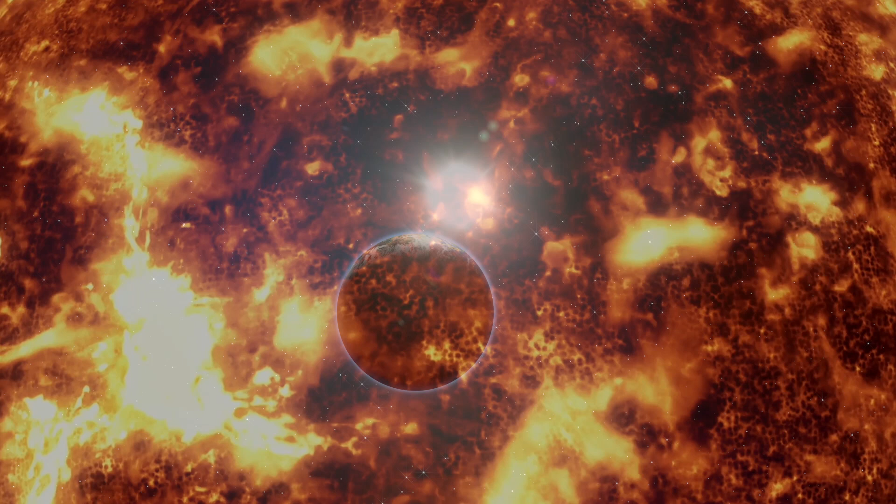More than 150 million kilometers away, this hot ball of glowing gases is the main source of energy in the form of heat and light necessary for all the Earth's processes. Arguably, the most important process is photosynthesis, where light energy from the Sun is converted into the chemical energy required to sustain life.

Without the heat of the Sun, the Earth's surface would be about 32 degrees Celsius cooler, and experts estimate it will begin to cool within 5,000 million years. Until then, it will remain the largest source of electromagnetic radiation in the planetary system, transforming 700 million tons of hydrogen into helium every second, or 5 million tons of matter into energy.

As our nearest star, the Sun marks the beginning and end of each day and shapes our seasons and climates. Therefore, it is of little wonder that the Sun has been the object of man's curiosity since time immemorial.

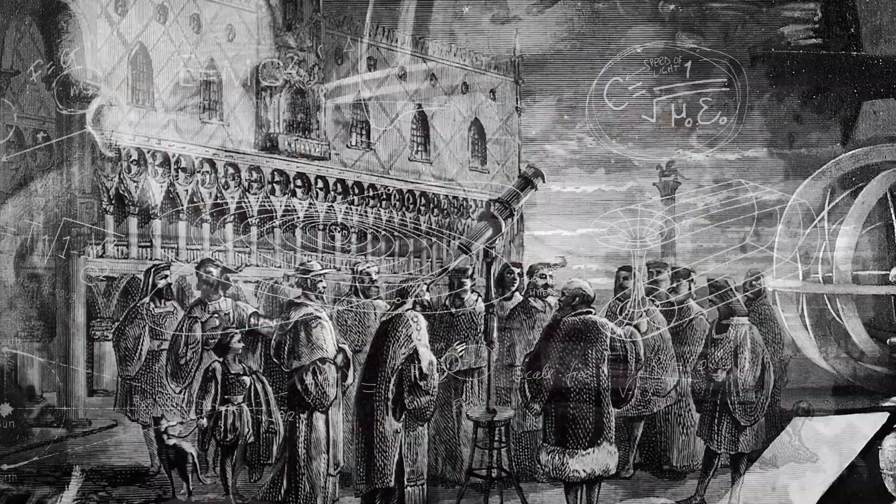In the 17th century, in his quest to unravel the secrets of the universe, Galileo designed and built the first known astronomical telescope. His telescope allowed him to make discoveries such as sunspots, confirm that the Sun rotates, and that planets orbit around the Sun, not the Earth.

400 years later, man is still observing the Sun with the same fascination as Galileo. Recent technological advances have been an important step forward for the astronomical engineering sector, offering the astronomical community the opportunity to study the Sun with more precision and rigor than ever before.

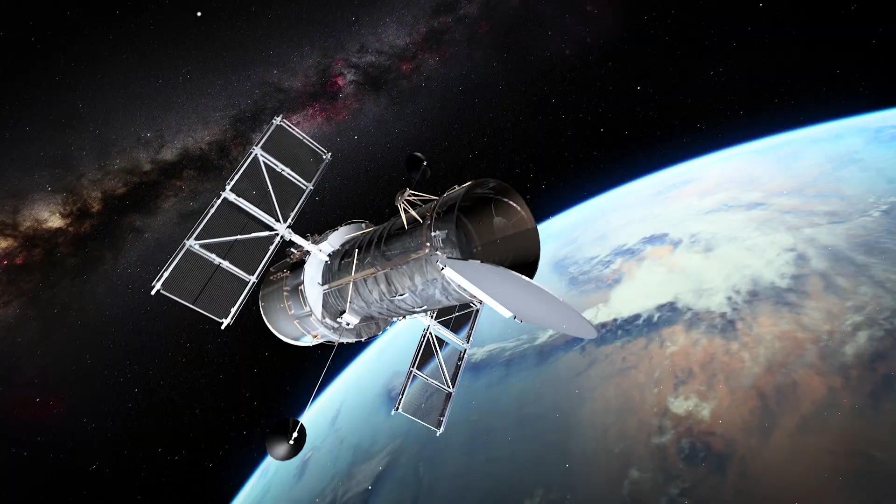Successive achievements in the field have led AURA, the Association of Universities for Research in Astronomy, NSF, the National Science Foundation, and the NSO, the National Solar Observatory, to launch the DKIST project, the world's largest solar telescope. These are the same organizations that in 2010 put their faith in IDOM to design, manufacture and assemble the dome of the telescope.

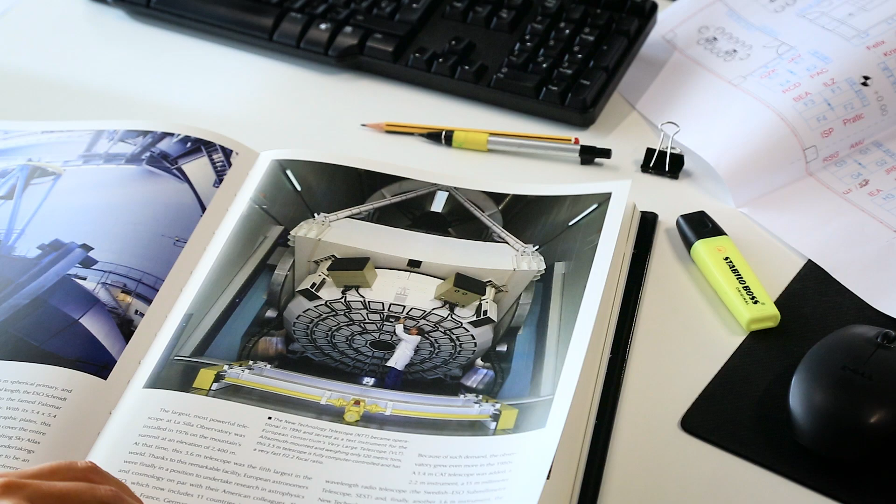This project has been implemented by IDOM ADA, the Advanced Design and Analysis Department of IDOM. IDOM ADA is responsible for leading some of the most challenging and innovative projects of the firm, using cutting-edge technological innovation in the development of structures, mechanisms, and control systems.

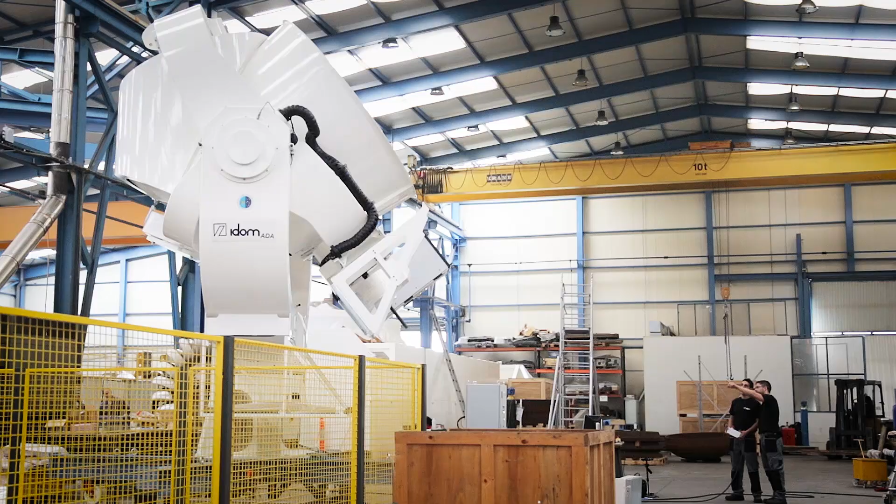IDOM is developing a significant activity in the astronomy field. It has designed and been engaged in the fabrication of some of the largest, most complex enclosures in the world, the QUIJOTE CMB project telescope, and telescope systems for large telescopes such as the folded Cassegrain instrument rotator for the Gran Telescopio Canarias on La Palma.

We have a large experience in manufacturing and fabricating capabilities all around the world, everything from industrial projects through scientific and testing projects, everything from football stadiums to oil refineries. Telescope projects and astronomy projects are similar in complexity and have a lot of challenges for on-site work.

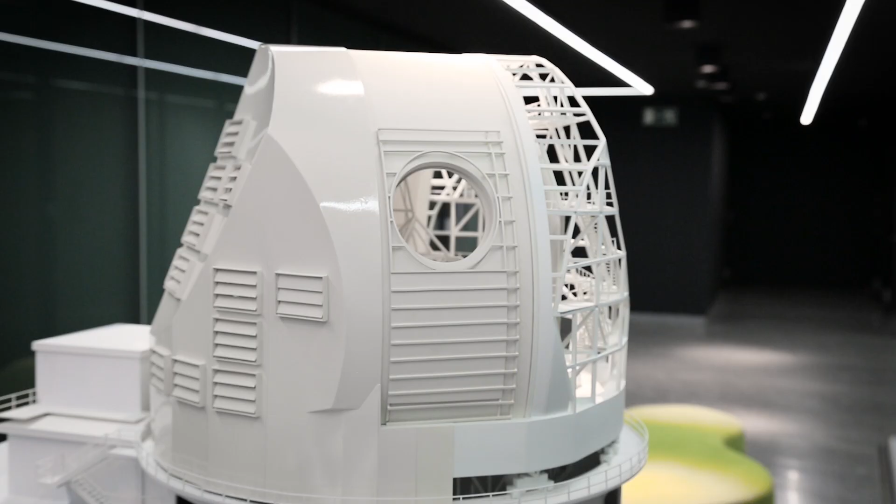The DKIST enclosure was a very attractive opportunity for us, a real challenge that we wanted to take. IDOM supplies the DKIST dome as a fully manufactured and commissioned turnkey part. We do not just supply engineering, we supply the whole manufactured part, in close collaboration with our office in the US. It has been a very effective collaboration.

This structural masterpiece, with which the Sun can be observed as never before imagined, will be installed in the archipelago of Hawaii in 2016, specifically at the Haleakala volcano on the island of Maui, at over 3,000 meters above sea level.

From there, highly qualified astronomers can study and anticipate the behavior and variations of our nearest star, which directly affects our climate. The same star we are analyzing to understand the processes of fusion that we are now trying to replicate as a source of alternative energy on our planet, and whose solar storms interfere in our electrical and electronic systems.

However, although it is being installed in the middle of the Pacific Ocean, the design, manufacture and pre-assembly of the dome has been carried out on the other side of the world, on the outskirts of Bilbao, in the Basque Country, near the headquarters of IDOM.

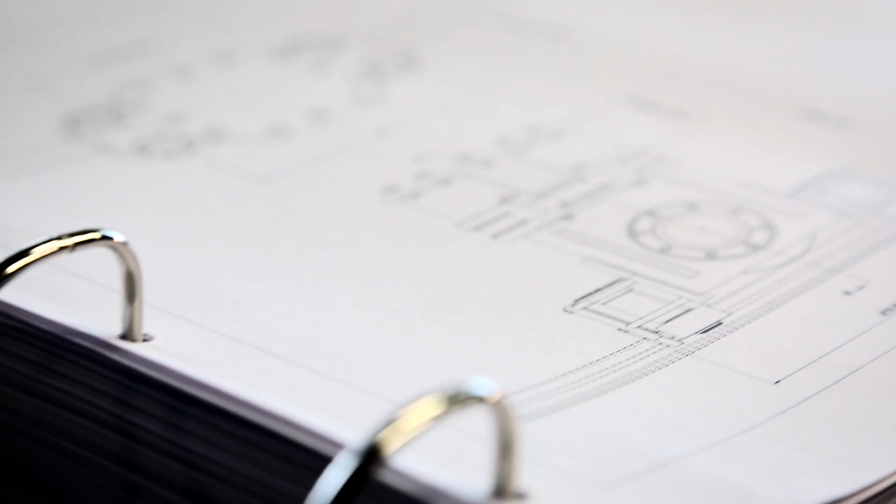We explored the options of fabricating this all over the world. We initially thought of fabricating this in the US directly. Finally, we also analyzed the possibility of manufacturing this in Bilbao, close to our headquarters, and we found it was the most cost-competitive solution. So that's the reason why we opted for this solution.

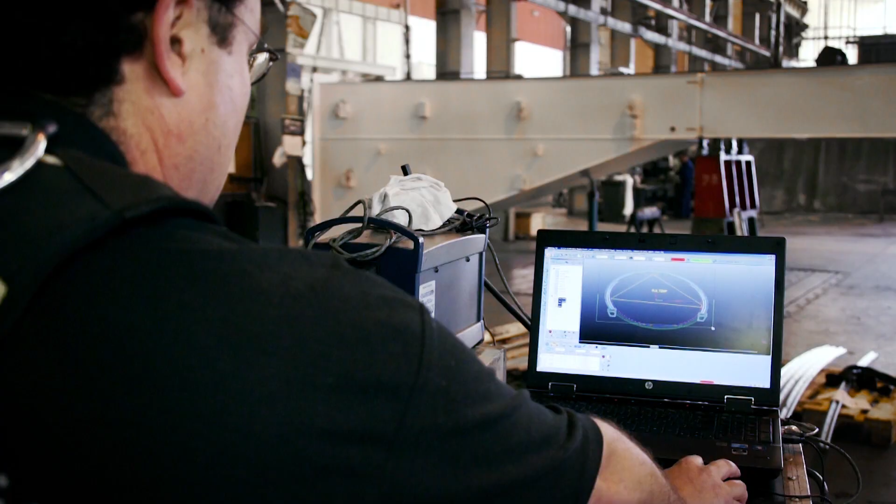We have here a large number of industries that provide high technology solutions at a very competitive price. Truly, the fabrication quality and capacity of the Basque region was outstanding, and it was a lucky coincidence that that kind of fabrication resource was also within easy driving distance to our headquarters in Bilbao.

With that, what we try to achieve is to perform the assembly in an area where we have really close access to equipment, to a crew for adjusting parts, machining, in order to be able to solve any problem that we could find out during the assembly.

In 2010, a team of highly qualified IDOM professionals began planning what was to be our most innovative engineering project. A complex task that involved close collaboration with our client. An extremely high level of coordination between the teams involved in different parts of the world, such as Germany and the United States, was also essential.

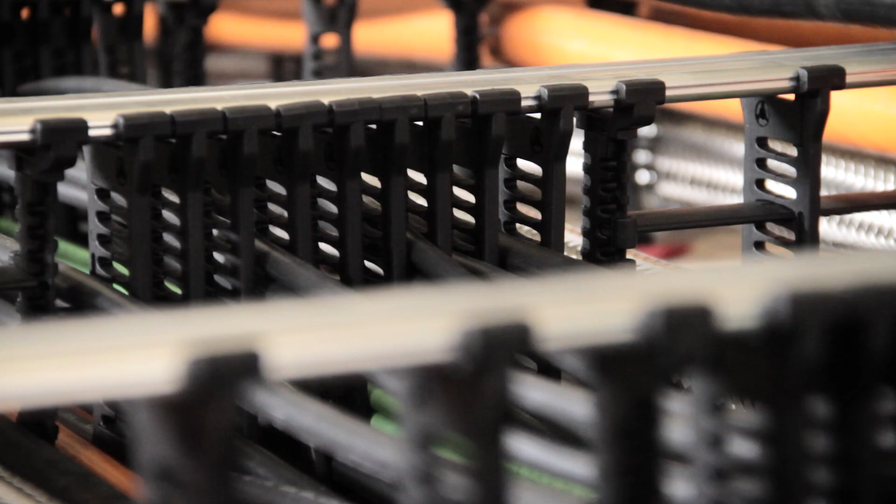AEC and IDOM have great experience in providing feasibility studies in all types of projects. One of our values that we provide clients in the astronomy sector is our ability to work on all phases of the project. Everything from preliminary feasibility type studies all the way through detailed design, fabrication, and then construction phase services.

One of the primary challenges on this type of project is to convince the customer of our ability to work in a multi-office environment. Those challenges can be overcome with great communication, where we've got a customer located in one section of the world, the project's going to be delivered in another section, and we've got design offices in the United States and Spain, all collaborating on the same project.

This means that we try to build a very close working team together with our client. It's part of our philosophy.

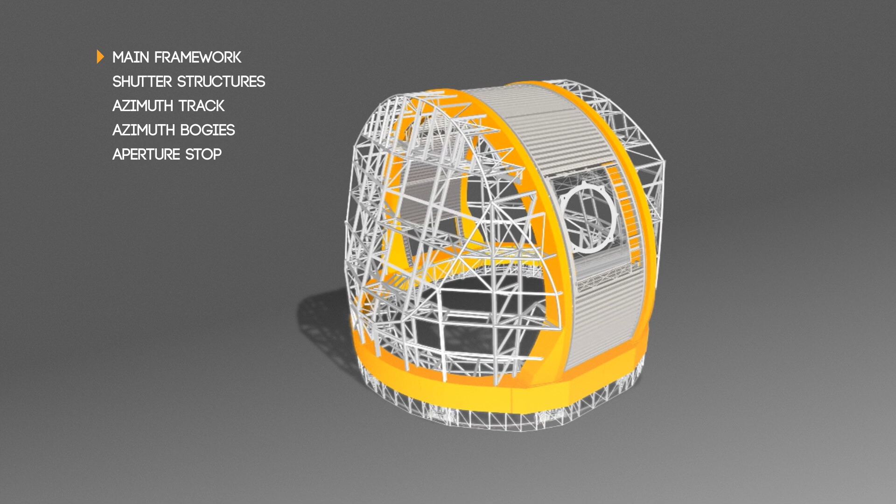Hundreds of specialists have worked hard for 4 years to bring the dome to life. 27 meters in diameter and 22 meters high, covering the heart of DKIST. Equivalent to a 7-story building and weighing 500 tons, the enclosure will move with millimetrical precision, allowing the 4-meter primary mirror to observe the path of the Sun throughout the day.

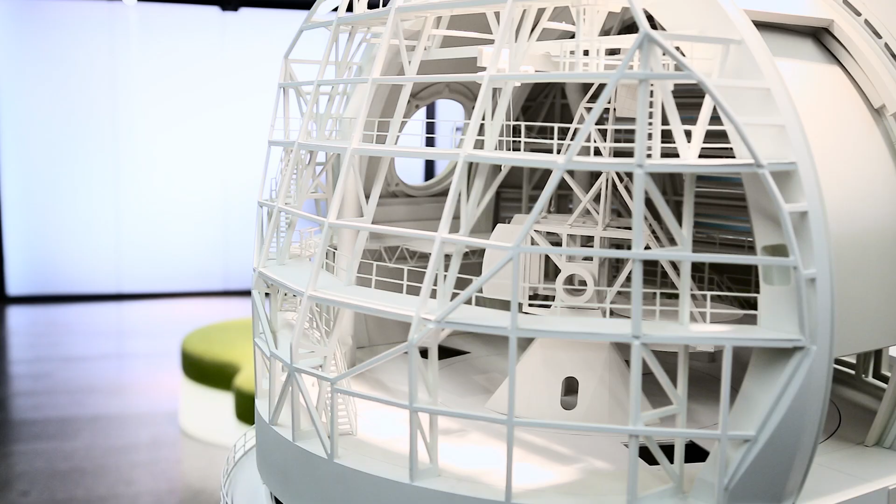IDOM has designed the DKIST enclosure, which is the rotating building that protects the telescope when it is not in operation, and that positions the entrance aperture stop during the observation, making sure that only the primary mirror is evenly illuminated. This enclosure is a perfect example of a system of systems.

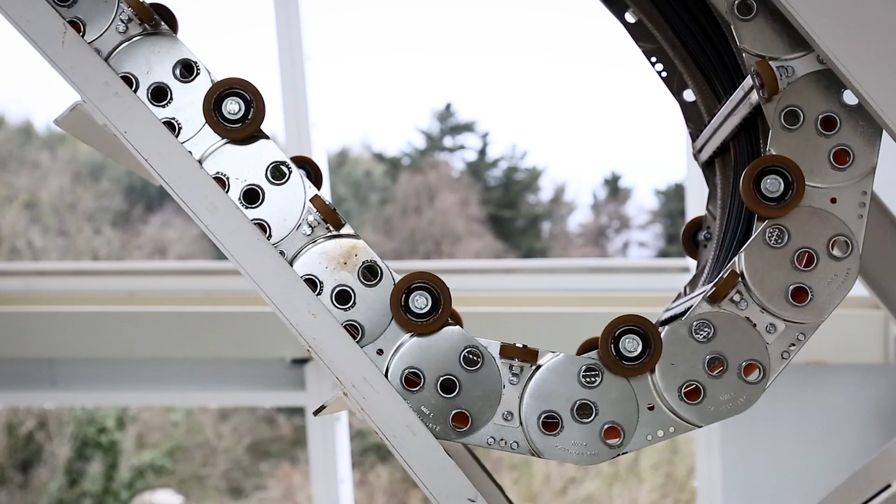The role of the system engineer is to maintain the coherence and to flow down all the requirements among a lot of different subsystems, as mechanisms, structure, cladding, all sorts of installations. So you need a very well organized and integrated engineering team to deal with the design and then to deal with the manufacturing and commissioning of the projects.

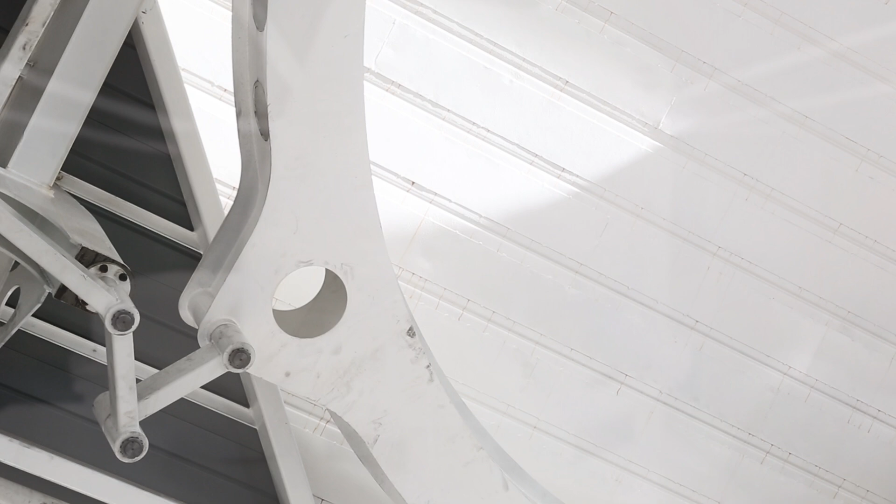From the beginning of the design phase, the complexity of the structure has been a real technological challenge. Its great dome would have to move with an accuracy better than any other telescope dome. An even greater challenge when we consider that the design of precision systems are the Achilles heel in the construction of this type of rotating building.

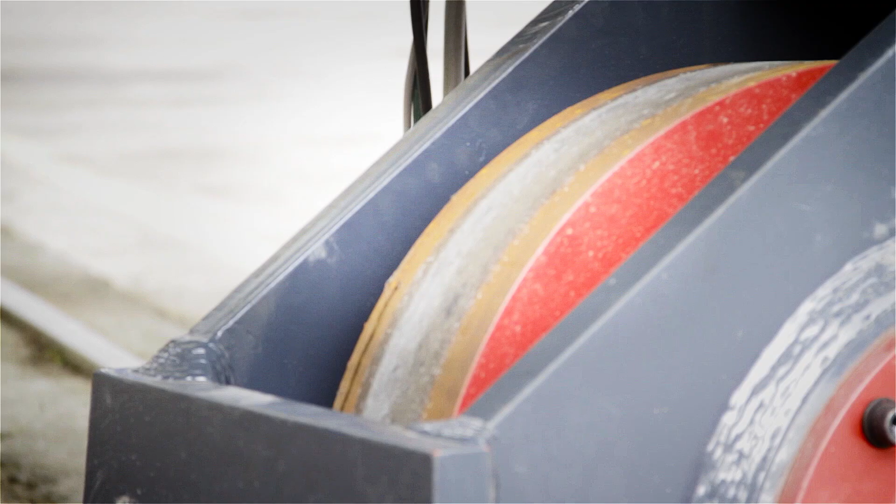To move such large pieces of steel in a very precise and smooth manner is a problem that's been attempted by many telescopes and not always achieved. Usually, telescope domes are mechanisms that only need to be moving in a discrete way, performing large movements to correct the position of the aperture of the telescope, and are systems whose reliability is far from ideal.

The dome consists of two fundamental systems that allow the Sun's position to be precisely tracked. The first is the shutter system, which positions the opening of the telescope in elevation and contains the mechanism that opens and closes the aperture cover, allowing sunlight to shine on the primary mirror of the telescope, while protecting it when not in use. The second azimuth system permits the large dome to rotate using 10 bogies.

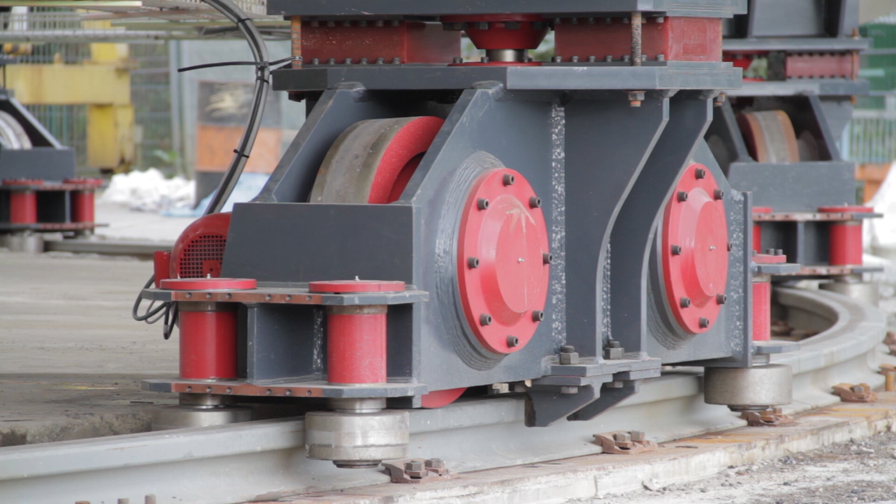The system is equipped with a total of 8 gear motors and 18 steel wheels.

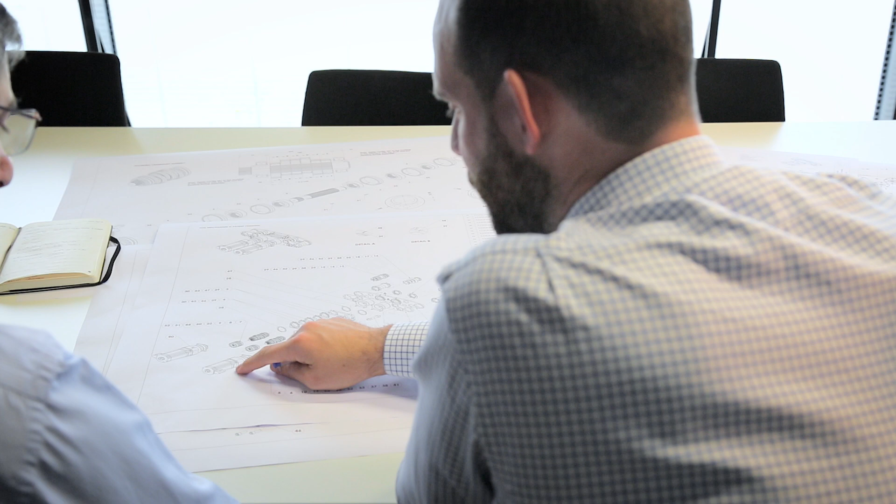A new system was needed for the DKIST, more precise, durable and reliable than any other telescope, to correctly move the shutter system, whose main structure weighs 30 tons. The mechanism that moves the aperture in elevation is a shutter mechanism similar to that of other telescopes, but it has been specifically designed to avoid the problems on other similar structures, and it is driven by means of a crawler mechanism, which is an innovative mechanism designed and patented by IDOM in order to be able to move large structures in an efficient, reliable and accurate way.

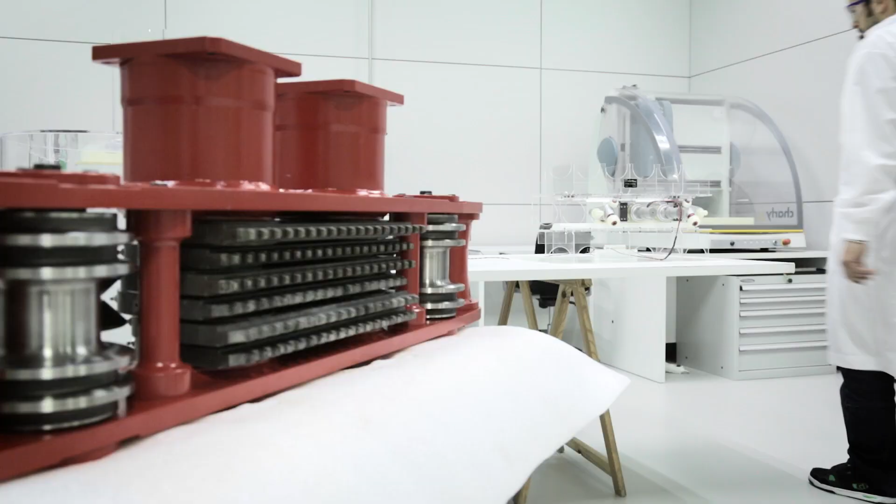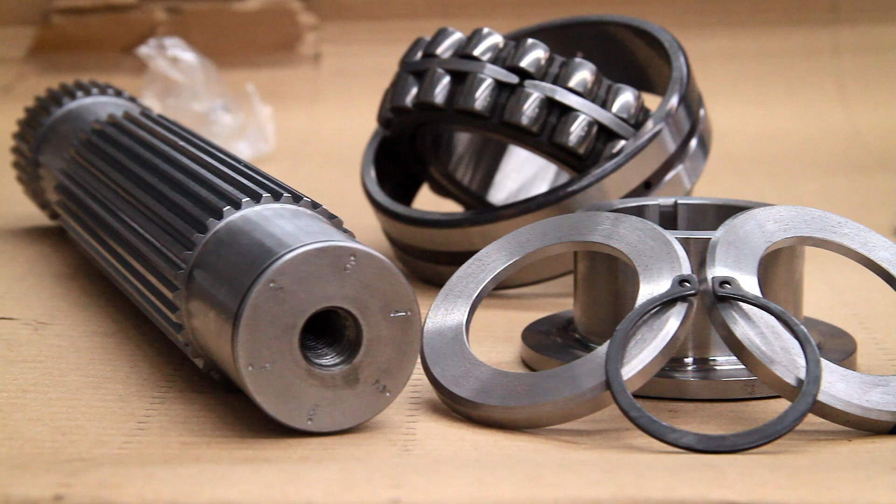The crawler mechanism consists of a system of 6 toothed chains. The special configuration, driven by motors, would smoothly move the structure. Thanks to the multiplying effect, the two units integrated into the dome have the power to move the 30 tons of the central structure and the counterweight system. A mechanism capable of moving large structures with a level of efficiency and precision unknown until now.

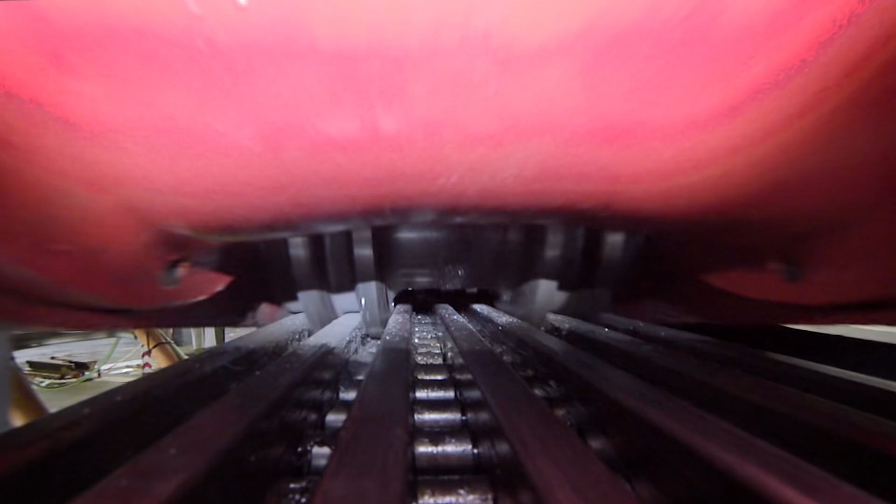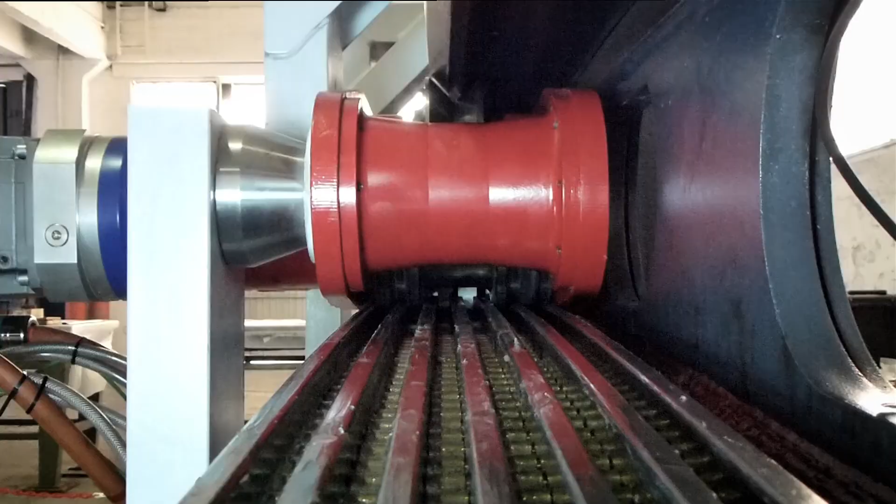The crawler unit concept is something that has been in the department for a long time. A new patented mechanism that was designed by our department and that we decided to perform some early tests on a prototype unit in advance in order to assure during several life cycles of the mechanism that the tolerances, the durability of the mechanism was the one that we were targeting. The tests carried out on the preliminary prototype proved a success. The team had engineered a mechanism that would help them overcome the most important challenge of the workings of the dome.

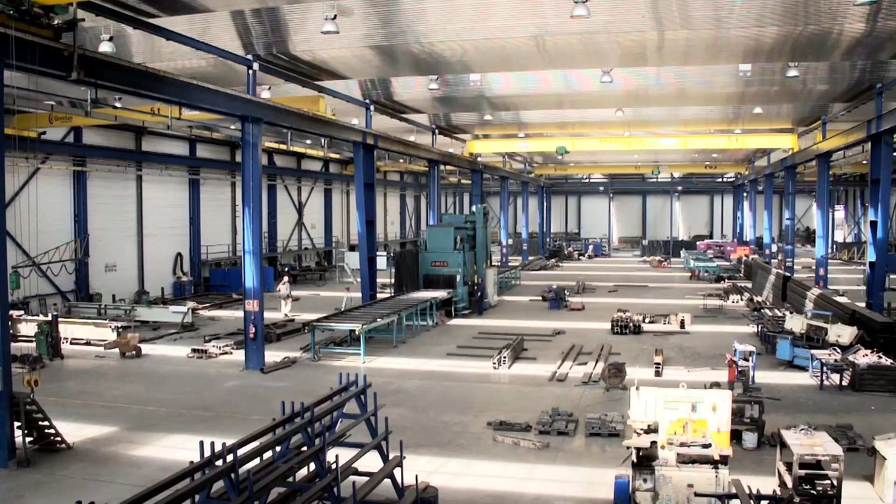All that remained was to design a suit for the Great Dome, the secondary lateral structure and the cladding system. The secondary lateral structure was designed as a steel skeleton consisting of 10 large vertical trusses and 6 horizontal trusses. Between these, hundreds of crossbeams would complete the framework to give the DKIST the necessary strength to withstand major earthquakes in one of the areas of the planet most affected by seismic activity and exposed to hurricanes at speeds of over 300 kilometers per hour.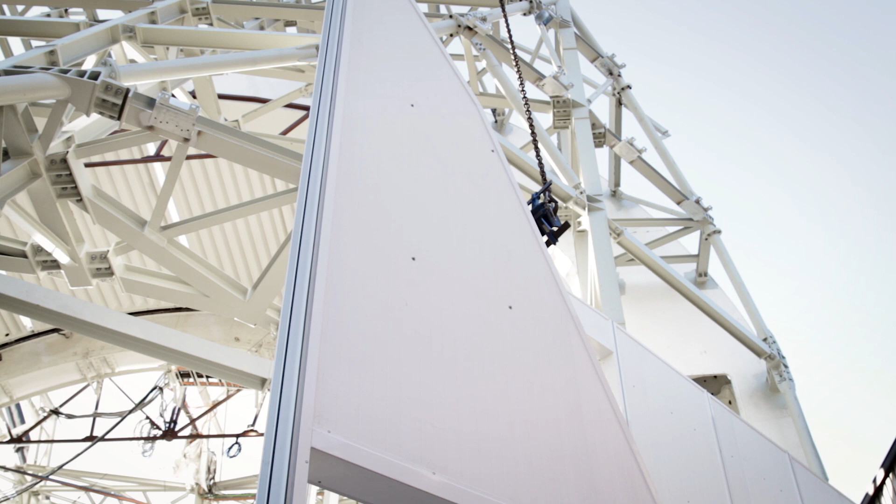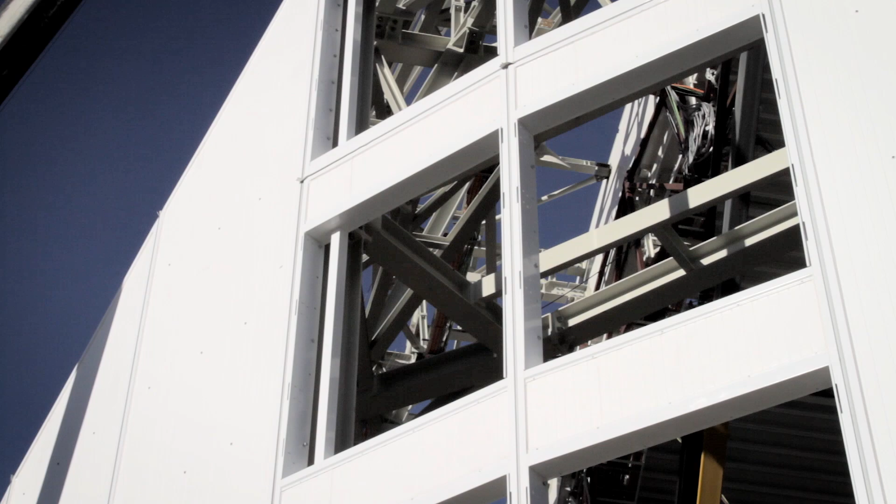The 250 white modules of the facade cover the dome, isolating the interior of the telescope from the effects of rain, snow, wind and solar radiation. Thanks to the highly reflective paint, a modern integrated cooling system and a system of more than 100 windows for ventilation, the effect of solar radiation on the surface of the dome is eliminated, and the inner temperature of the DKIST is perfectly balanced with the outer temperature, a key achievement that will prevent image degradation in this precise solar telescope.

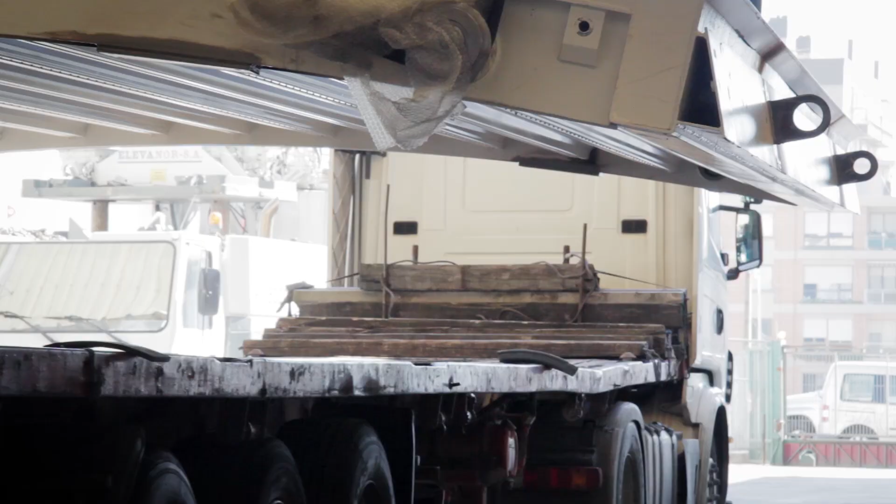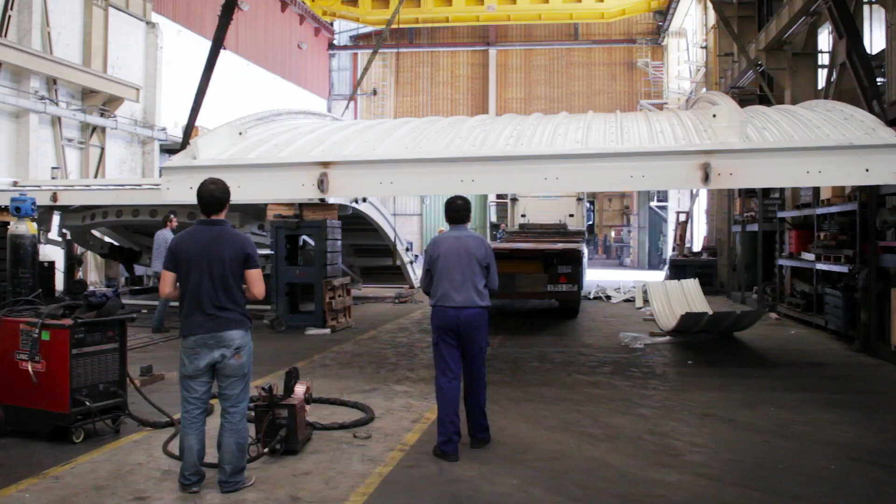After completing the design of the secondary structure and the modular cladding system, manufacturing and assembly phases commenced. The two stages were developed almost in parallel and allowed engineers to perform the factory assembly and test phase, make all necessary adjustments to the various components of the dome, and comply with all the requirements of accuracy specified during the design phase. During this phase, the assembly process itself was also tested. Since the process would have to be repeated in Hawaii, nothing could go wrong. Essential training that would serve to simplify the final erection process on a challenging site.

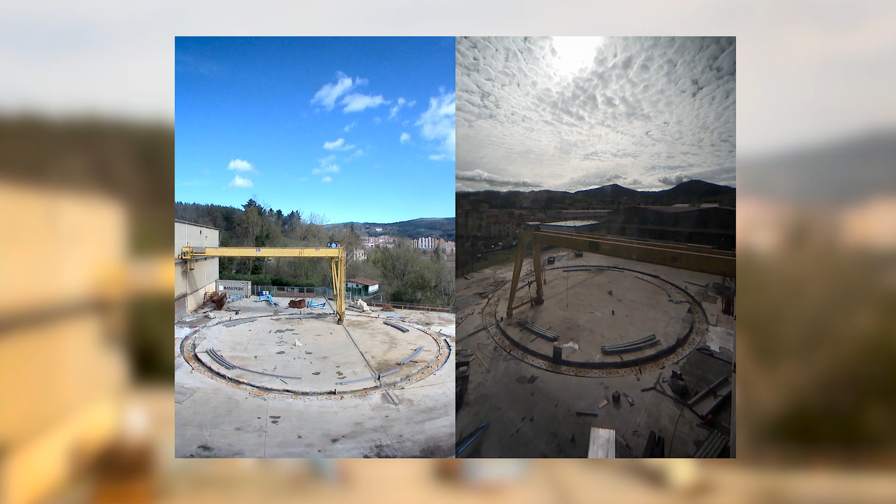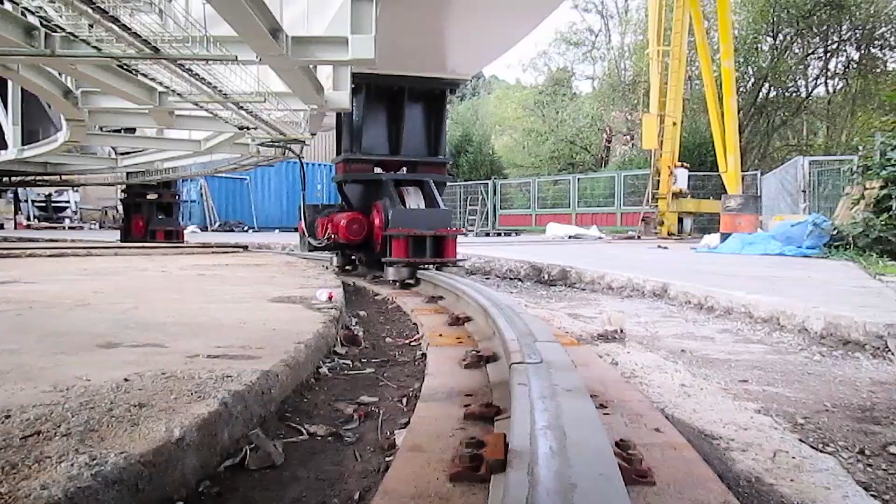The litmus test began in February 2013 with the task of site conditioning, making a replica of the interface between the building and the ground on which the dome would finally be installed. A surface on which the technical team installed a track composed of 15 segments on which the bogies would later move the azimuth system. After performing the assembly of the rail, we assembled the main framework. The main framework is composed of a base ring, which is 14 segments of around 10-15 metric tons, and two arc girders where the shutter tracks are assembled, also 9 segments each.

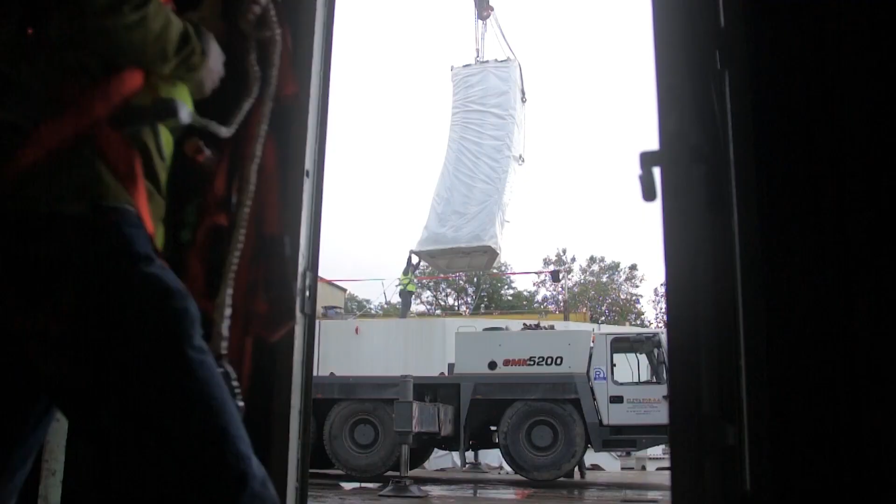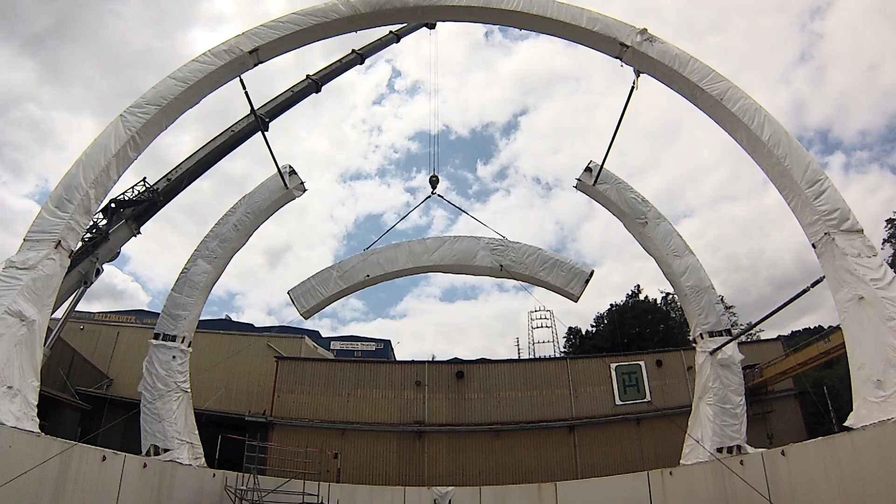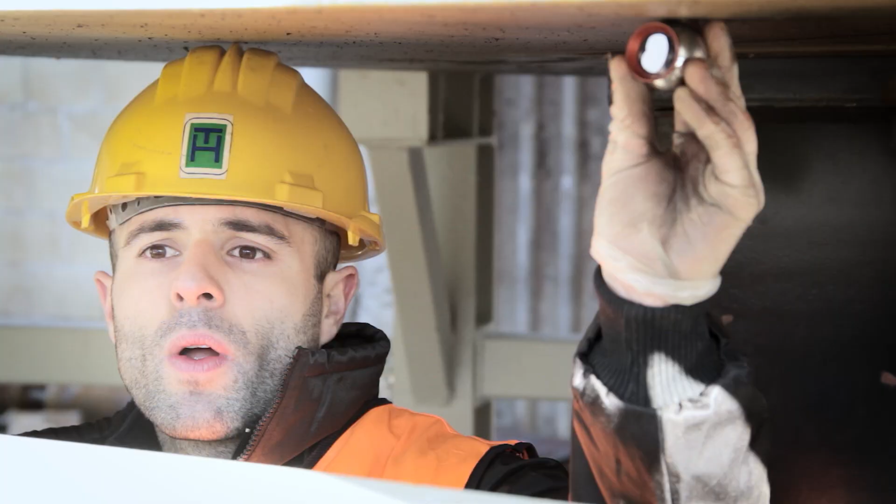Installation of both the main base and the two parallel arches was one of the most complex assembly operations. Each of the arcs has a track on which the shutter system moves back and forth, driven by the crawler mechanism. Two major elements that will determine the path of the eye of the telescope to track the orbit of the Sun. Smooth and precise movement incorporated in an infrastructure whose assembly was carried out to a margin of error of millimeters. The assembly that was performed at ground level, we achieved really tight tolerances under the millimeter. And after the assembly on the base rings, we were able to achieve tolerances under 2 millimeters, which for a large structure of 20 meters diameter was an amazing achievement.

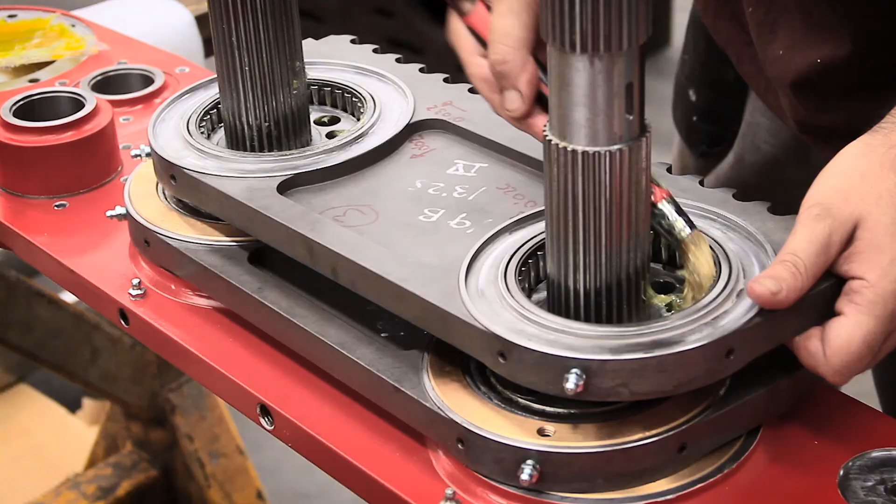Supported on temporary supports to avoid undue forces that could damage the azimuth bogies, the skeleton of the dome gradually took shape. Meanwhile, not far away, members of the IDOM team were finalizing the assembly of the components of the crawler, a delicate and patient assembly job that resulted in the star piece, the most innovative part of the Great Dome.

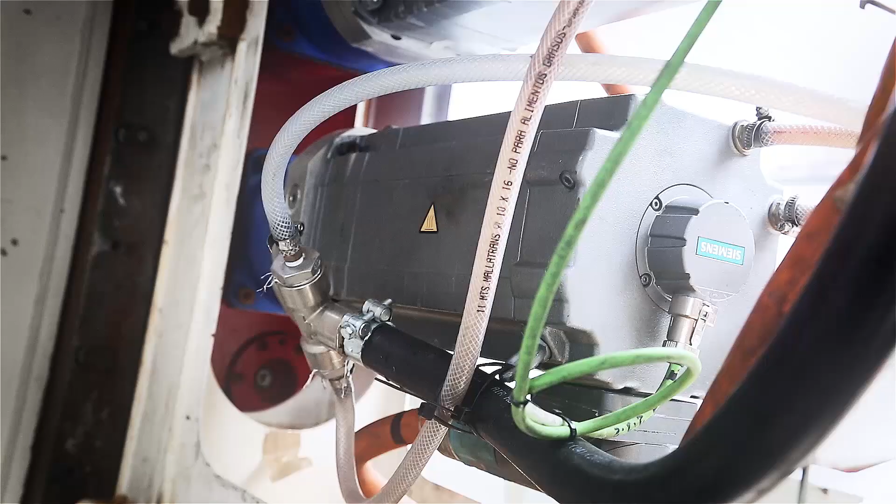Once all the pieces had been assembled, the crawler was subjected to several operational tests. It was confirmed that the crawler far exceeded the desired requirements for durability, accuracy, and reliability. A successful process that also served to help make this mechanism an even more perfect machine.

That early unit was tested replicating a life of more than 10 years. And in that process, we were able to learn and to do a value engineering of that mechanism in order to improve it for the final and best performance of the enclosure.

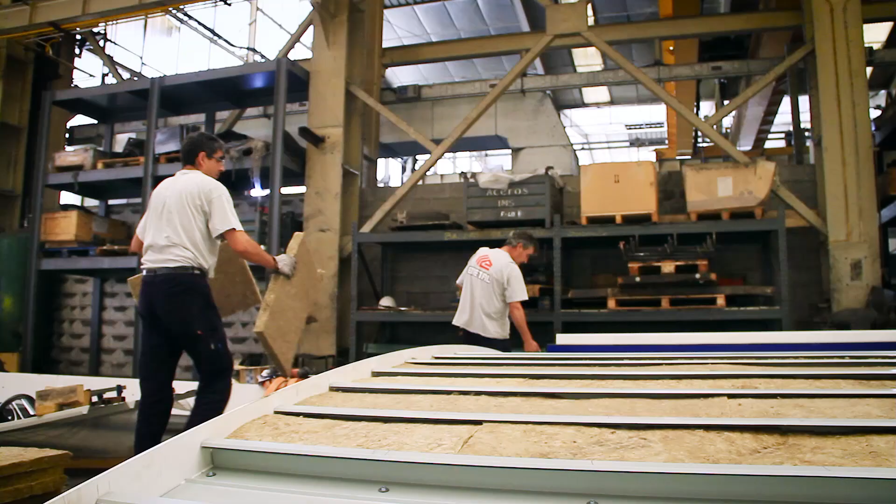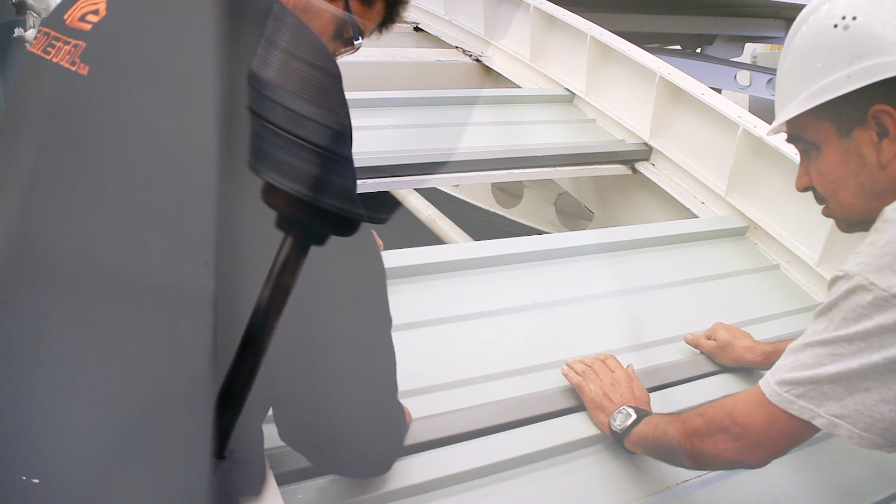With the crawler fine-tuned and the trusses of the secondary structure recently manufactured, the time had come to install the internal frame of the dome, an interlaced steel structure whose joints are the key to distributing the weights and forces that the telescope will be exerted to during its motion.

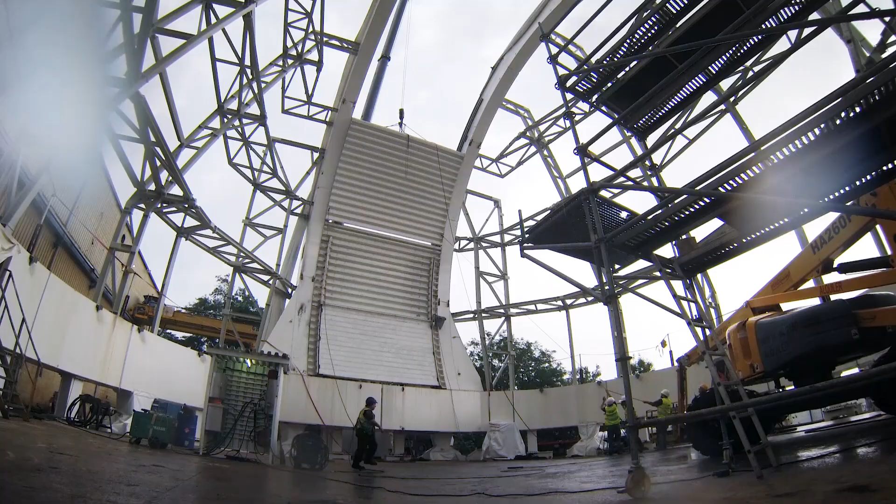Although it may look like the steel structure of a conventional building, it has in fact been created as a high-precision moving element. This is why it's been designed and built as if it were a machine.

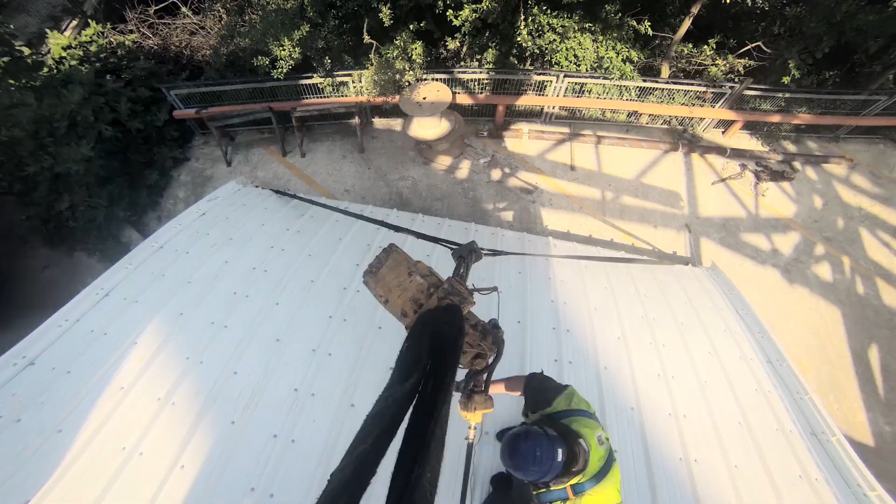With the frame completed, it was time to install the structure of the shutter system. 3 large 7-meter wide sheets, the largest of which weighing 30 tons, and 2 smaller sheets of 7 tons. Driven by the power of the crawler, it will determine the altitude positioning of the eye of the telescope.

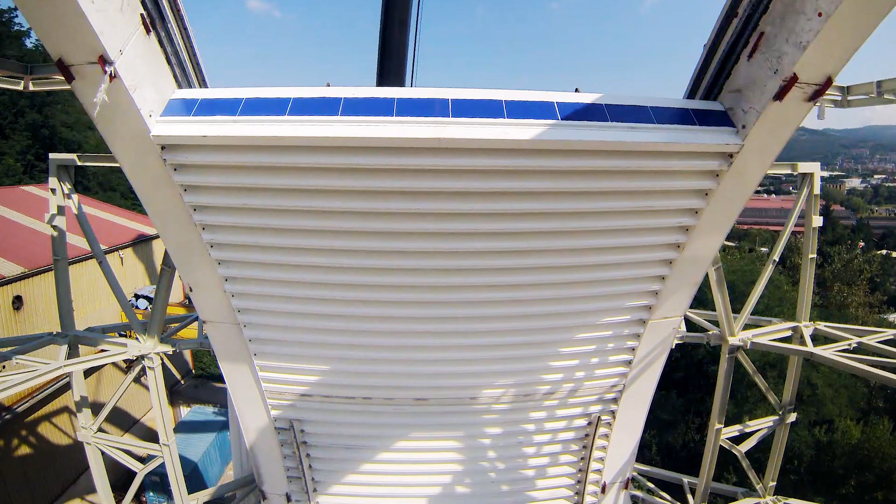Precision installation on the guide rails of the arches would not be an easy task, even more so under adverse weather conditions. They were the largest pieces to assemble. Although they are not heavy structures, it was a critical process during the assembly because with little wind, those structures could really move. And it was one of the challenges in order to be able to place them right between the arch girders on the shutter tracks.

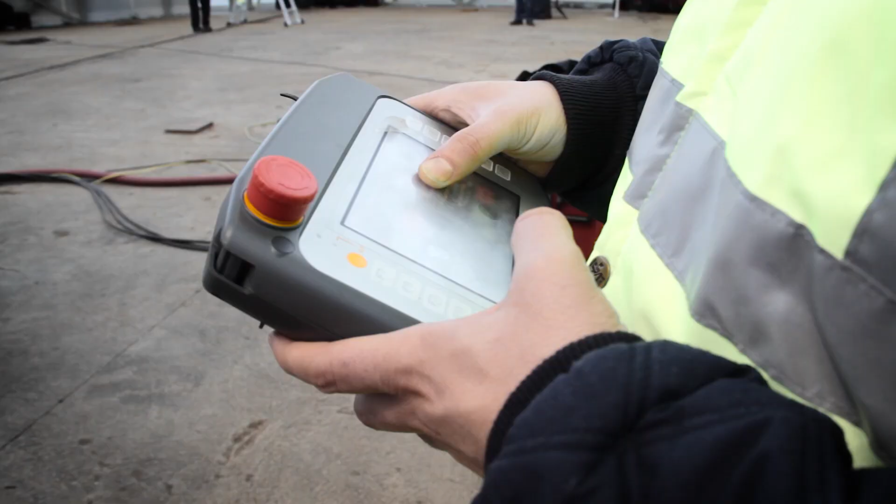During the factory assembly, we've been facing several challenges, and one of them has been the weather. Times in which we've been working with rain, with high winds, and so on, in conditions that were difficult. And this has only been possible with a team that was significantly involved and was able to bear all these conditions in order to make sure the project was properly achieved and completed.

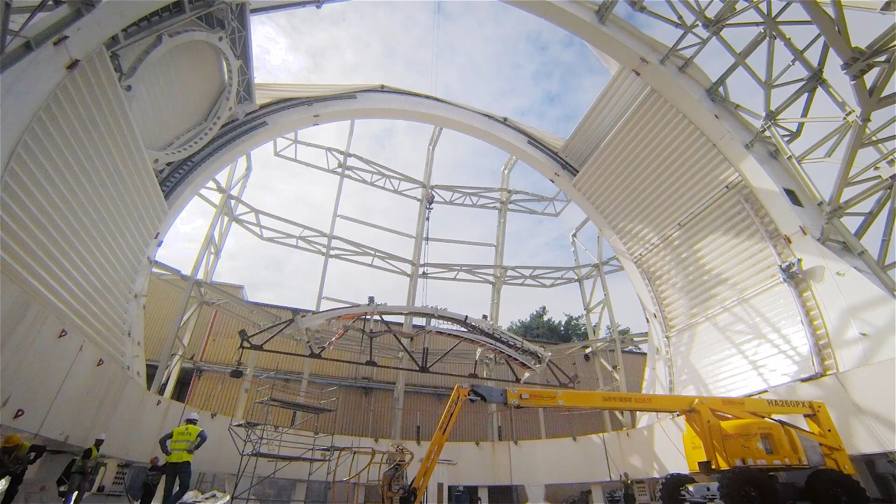Following this, the team from IDOM proceeded with the installation of a simplified version of the azimuth and altitude cable wrap. In other words, the system which provides electrical power, cooling water and control communications to the moving mechanisms.

Given its large size, assembly and testing of the final azimuth cable wrap were carried out in Germany at the manufacturer's facilities. This rotator unit is more than 20 meters in diameter, the largest ever installed on a telescope. Therefore, it had to be tested separately.

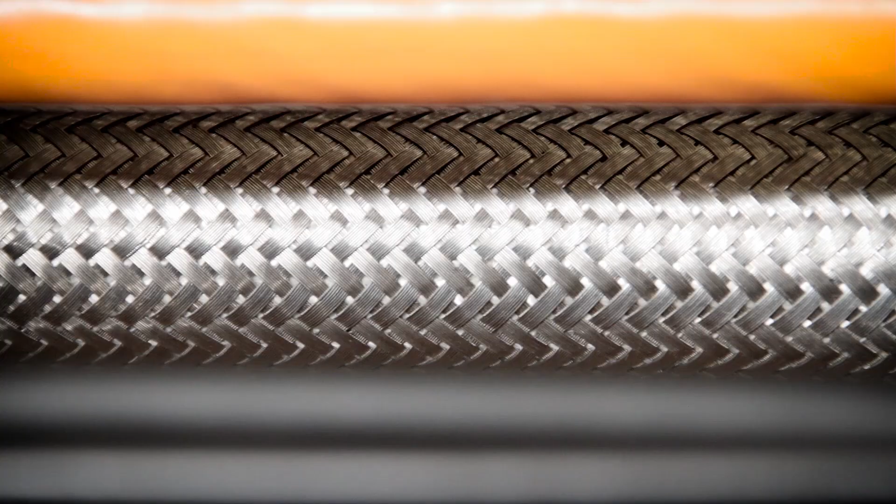The design and state-of-the-art equipment means that a force of less than 100 kilos is needed to move the 10 tons it weighs. An extremely smooth movement designed to prevent any disturbance that may affect the correct operation of the telescope.

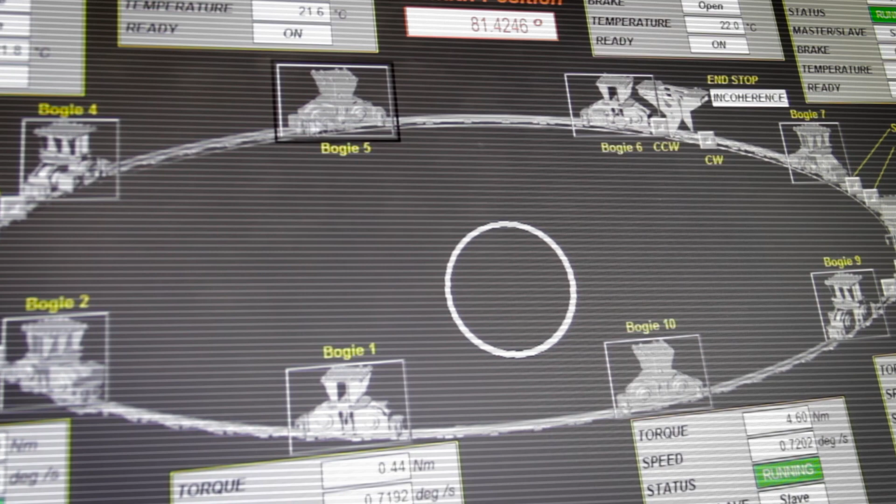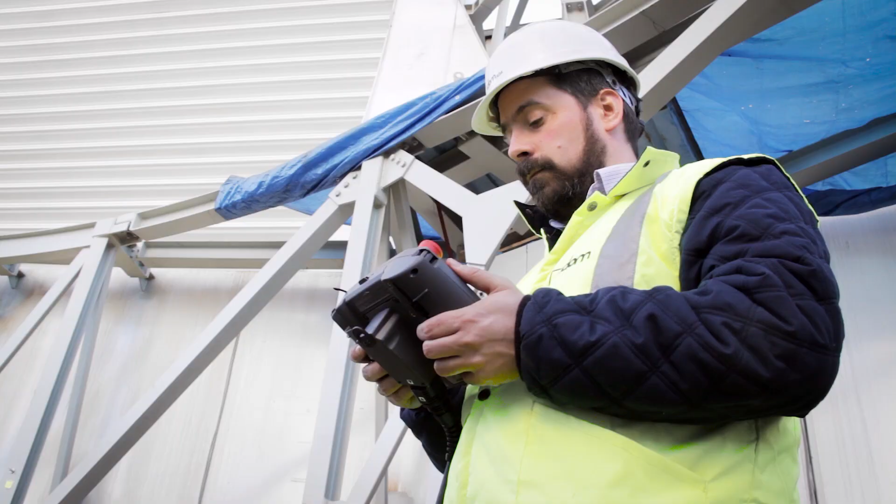Once the electrical installations were connected, it was time to activate the large dome to check that the tracking and synchronization movements between the two systems met expectations. Synchronizing the tracking means synchronizing azimuth and altitude movements. So it means synchronizing the rotation of 500 tons of steel against moving up and down 50 tons of a shutter.

The challenging points were to synchronize azimuth and altitude and to be speaking with the overall telescope control system. It was really challenging from the control point of view, and it's really incredible the accuracy that we have got with such a big structure.

After verifying that both the azimuth and the shutter system mechanisms were working properly, the engineers from IDOM lowered the dome into place on all 10 bogies. A complex operation which required 4 hydraulic jacks with a load capacity of 400 tons each.

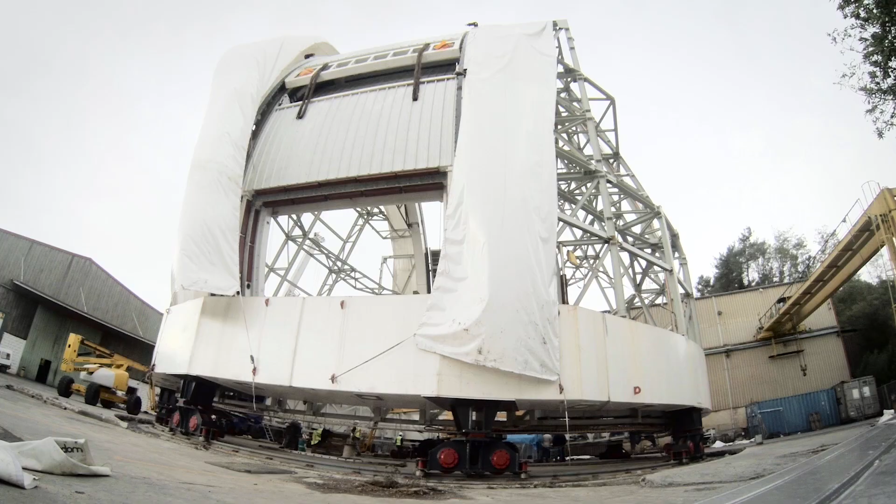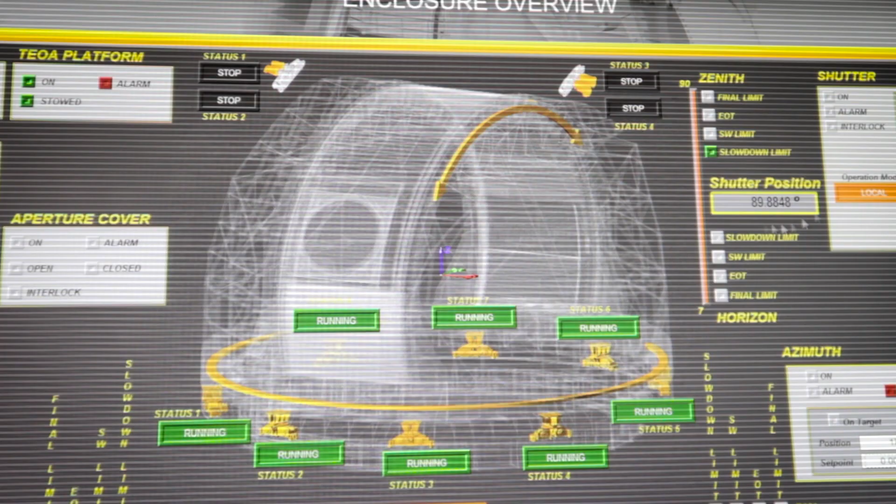With the 360-degree rotation at 100% speed capacity, the behavior of the control system and the operation of safety systems were checked before making the final adjustments. Taking into account you are mixing the torque of 8 bogies and 2 shutter mechanisms, the drive and control system is challenging.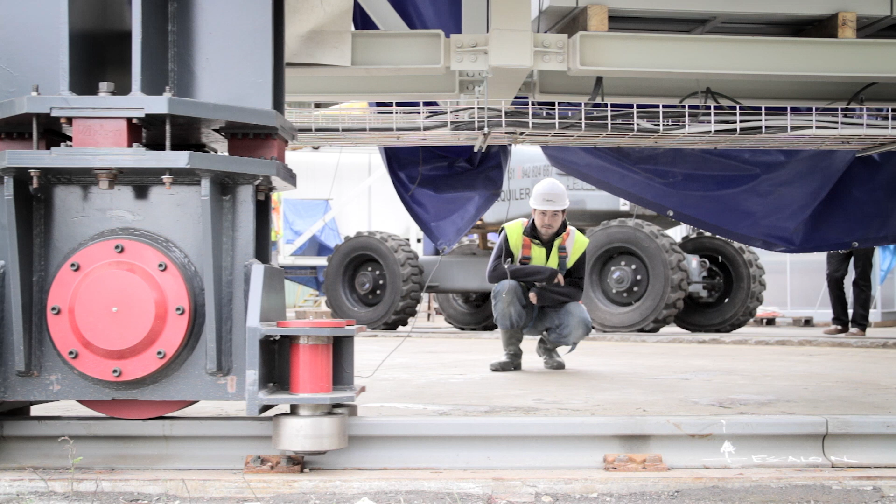One of the challenging systems of the telescope is based on a distributed control system, the control loops. Sharing the total torque among all the bogies, how you share the torque and how you achieve these strict pointing requirements was a key aspect of this, and we have developed very, very good control loops.

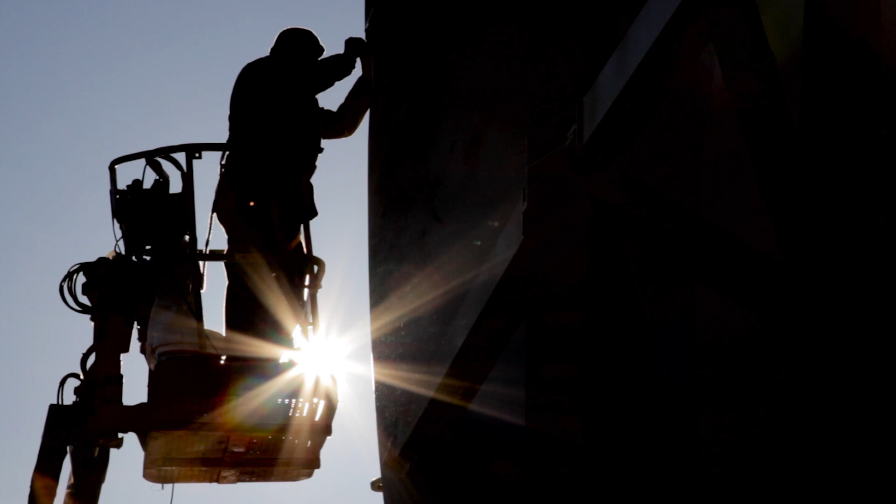While the rear door to the dome was being installed and the opening and closing mechanism and the TEOA platform were being completed, the giant puzzle was put together and the dome was given its color and definitive shape, a design that will make maintenance of the telescope mirrors much easier.

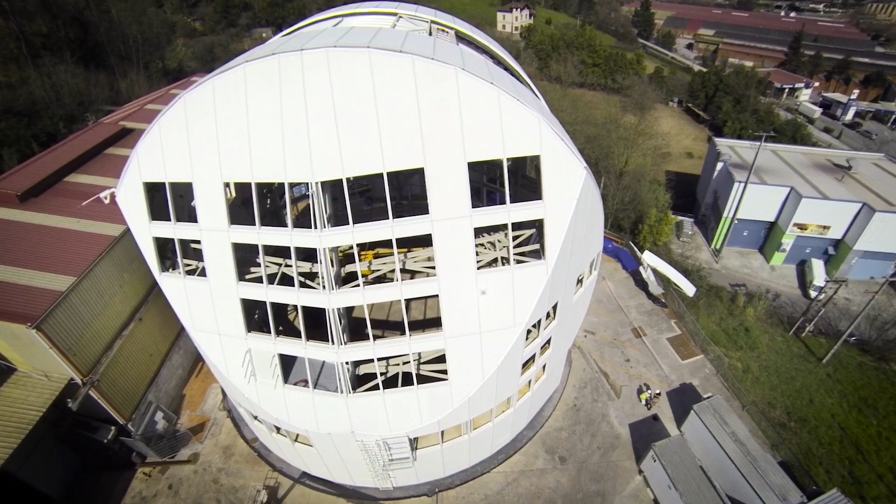With all parts and mechanisms integrated into the structure, the team from IDOM submitted the dome to its final test. In March 2014, the engineers put all the motion control systems into operation at different speeds. It was the moment of truth, the moment when the great dome, 22 meters high and 27 in diameter, would have to move its 500 tons smoothly and with millimetrical accuracy. After a few moments of great elation, the engineering team confirmed the success of the tests carried out during manufacturing.

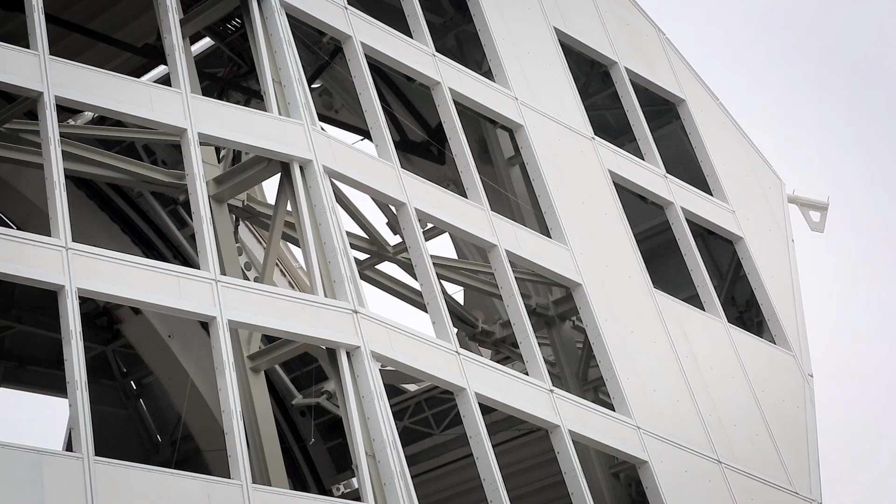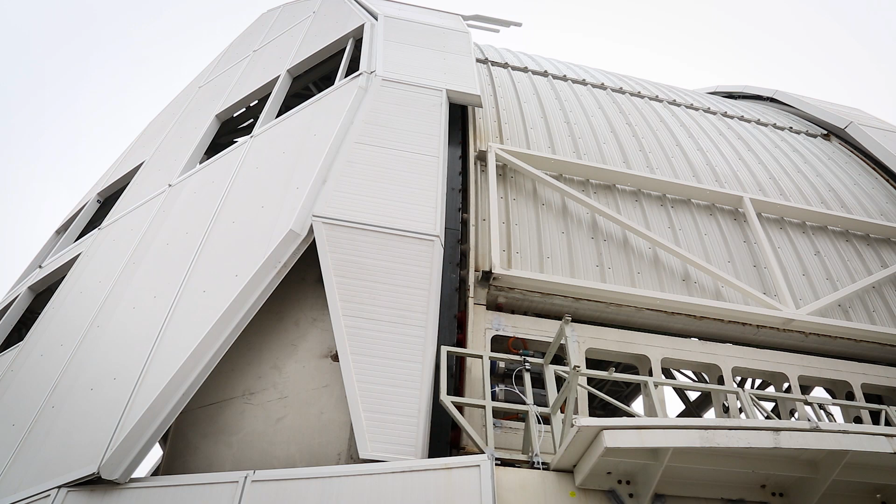With an almost imperceptible movement, the dome rotated smoothly at 0.004 degrees per second, far from the 2 degrees per second maximum speed that the motor of the dome is capable of reaching. A slow and difficult operational speed, but necessary to track the position of the Sun accurately. The requirements set during the design phases were more than surpassed, and the main mechanisms responded positively, well above initial expectations. This dome would move more smoothly and with greater stability than any other dome built so far.

Performing a factory assembly has a lot of advantages. The main advantage is that we have been able to test all the mechanisms and check the performance of the complete enclosure. We have also been able to perform most of the parts of the fabrication during the assembly in a way that all the parts have been exactly adapted to the real position of elements. And the last main advantage of this factory assembly has been that we have been able to test the assembly procedures using the same equipment, the same limitations that we have at the site in order to replicate exactly the same procedure that we expect to do in the mountain.

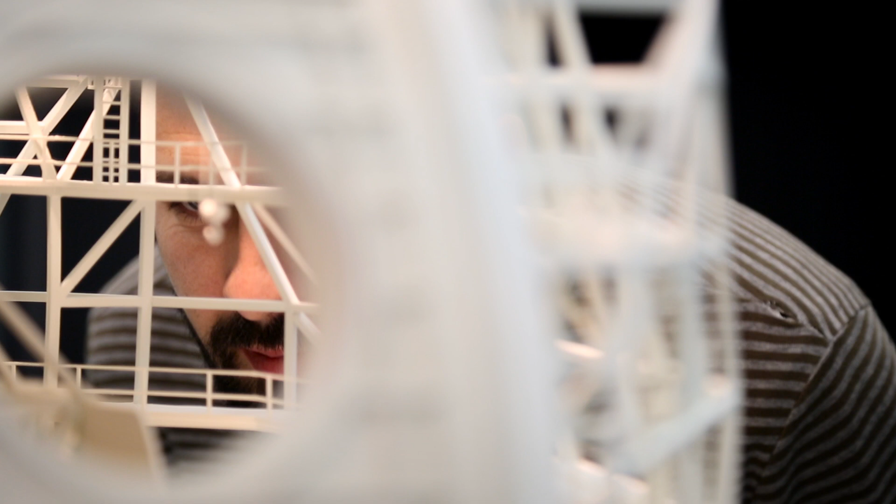After 4 years of hard work and dedication, the IDOM ADA professionals looked up to watch the movements of the dome of the world's largest solar telescope, knowing that they had just finished something that would go down in the history of astronomy. The perfect finale to a unique project, the success of which was a reflection of the high commitment of all the engineers.

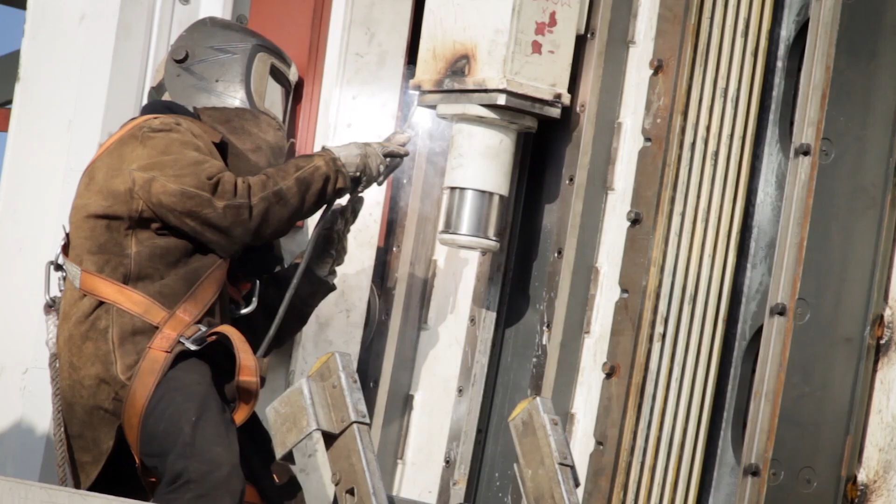One of the things that I'm most proud about of this project is the way that we've addressed all the technical challenges and maintained a great customer relationship. Our team made the project more than just a job. Challenges and questions have come up on this project all hours of the day, and our team has been able to think of this as more than just work, but it's really a passion to IDOM and AEC. This is our whole philosophy: to maintain the client relationship is a must.

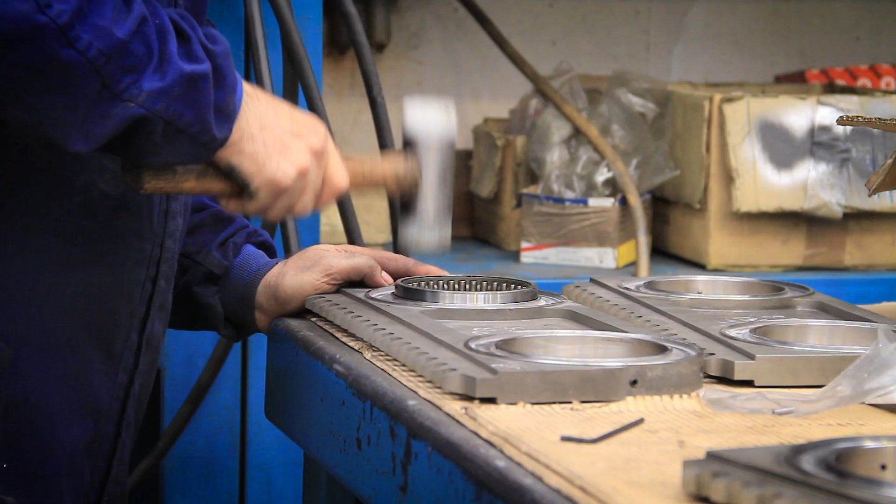A number of the project team members are amateur astronomers that have been engaged on this project. An extra component of passion, I would say. Everybody in the whole team must be highly motivated in this project. Our engineers, our collaborators, our suppliers, our client, that must be fully integrated in the team. As a system engineer, it has been really a pleasure just coordinating such a big and such a fantastic team.

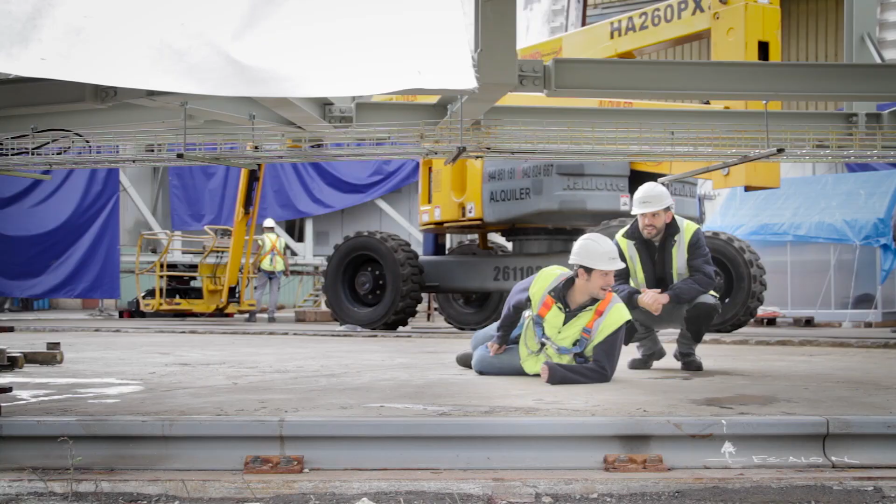I really think it's the dream of any engineer, to be able to be involved in such a unique project that it's going to mark the history of the sun science, and also to be involved in all the different phases of the project. I feel fortunate of having been able to work together with such a great team, to have the opportunity of working close by to all different expert and qualified persons of different fields in engineering that have made this dream become a reality.

As it should have done, IDOM opened the doors of the dome in the company of its clients, collaborators and local authorities with an inaugural ceremony to mark this milestone of modern engineering. The farewell ceremony was a happy day. Somehow all this joy from our side meant celebrating that we had been able, after so many years of hard work, to supply, to design, to manufacture, to commission what is the world's largest solar telescope.

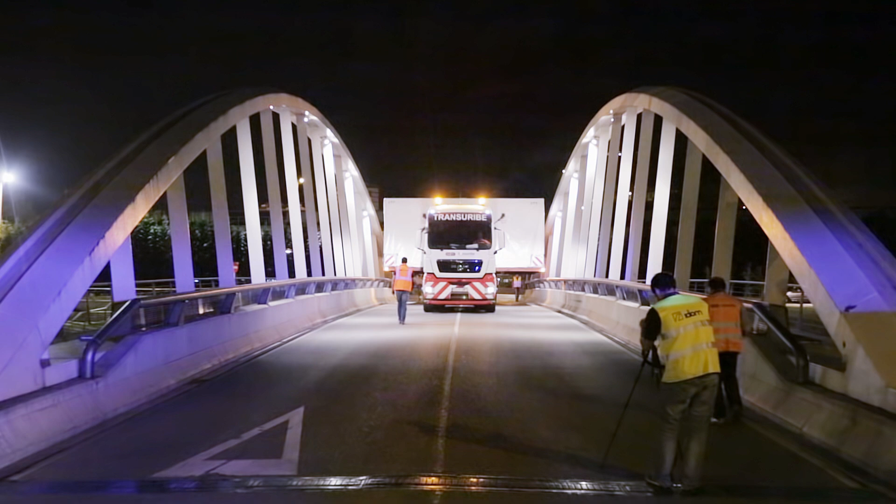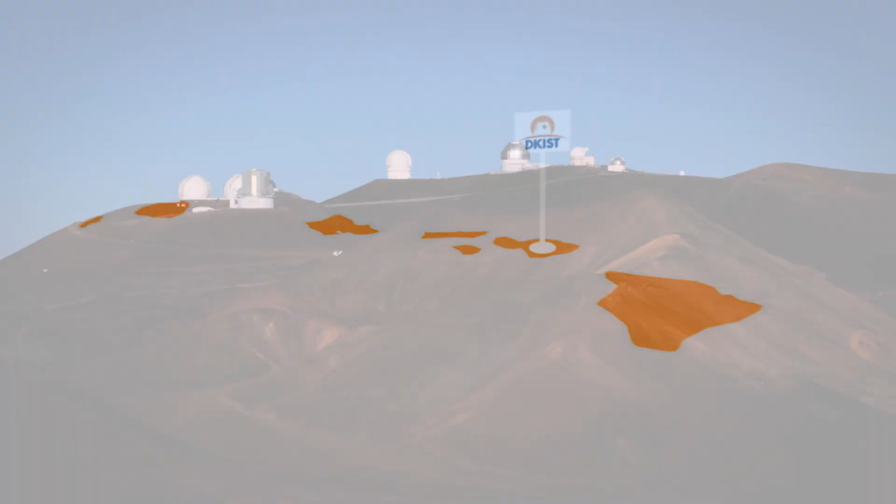This was the grand farewell before disassembling all the work carried out and packing the dome into 60 containers that would leave from the port of Bilbao towards the archipelago of Hawaii. The different parts and pre-assembled dome mechanisms will travel thousands of kilometers to the island of Maui, where the DKIST will be installed at 3,000 meters above sea level.

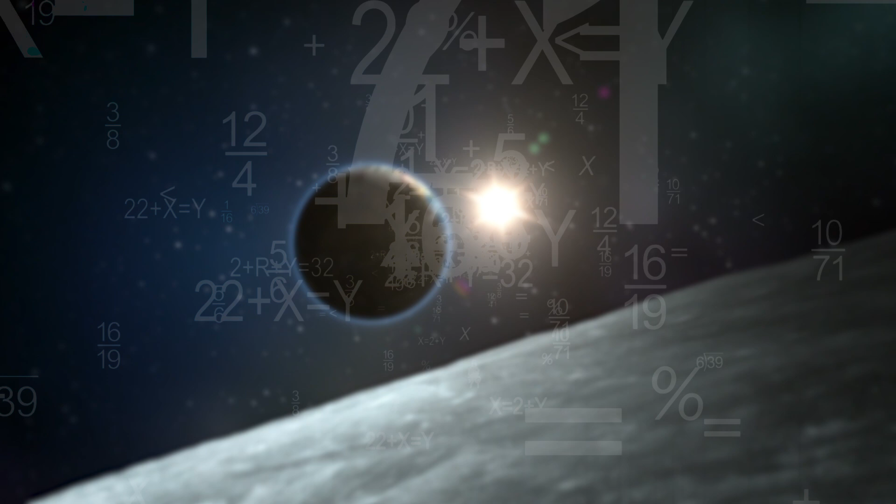The same sun that the world's most important astronomers will observe through the world's largest solar telescope, with a sharpness and definition unknown until now. Constantly gathering information about its behavior, allowing us to unravel its greatest secrets and improve our relationship with the main source of life. All of which is a giant leap forward for researchers in the observation of our solar system, allowing us to take over the baton from Galileo and study the great unknowns of the Sun with the most advanced technologies of our time.